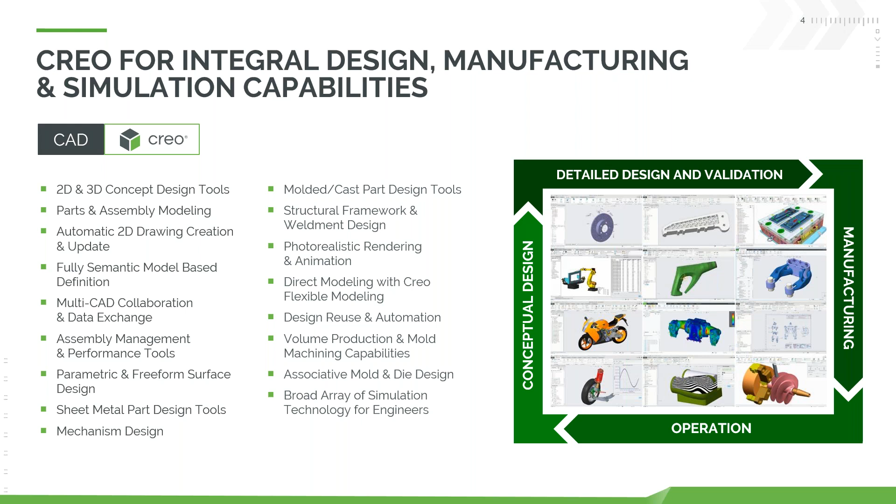With every release, we always focus heavily on improving this broad set of capabilities across the entire breadth of the product, focusing on making the end users more productive on a daily basis, whether that's refining certain workflows, making tools easier to use, or adding additional capability to the product - really focusing on making every engineer more productive day-to-day.

So we look at these emerging technologies on an ongoing basis and figure out which are relevant to manufacturing, which are relevant to CAD per se, and start integrating those technologies into Creo - but integrating them in a way where they work exactly the same as any other capability in Creo. They're not a separate standalone technology that results in a broken tool chain. They are part of the design process. They are fully integrated into Creo. They look and behave exactly like a Creo application.

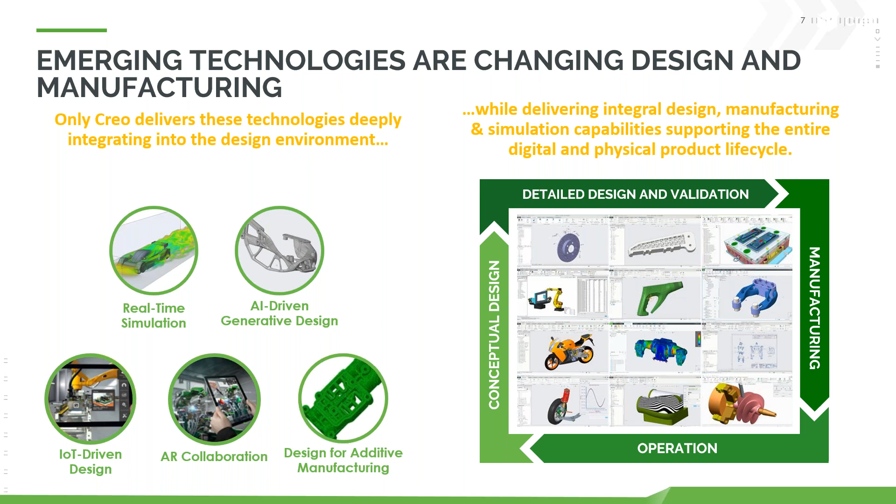So hopefully that's given you a quick high-level overview of the strategy with Creo—twofold: focus on expanding and making the core set of Creo capabilities easier to use, making the everyday user more productive, while at the same time understanding, leveraging, and integrating emerging technologies into the Creo set of tools, making sure Creo remains at the forefront of innovation and engineering.

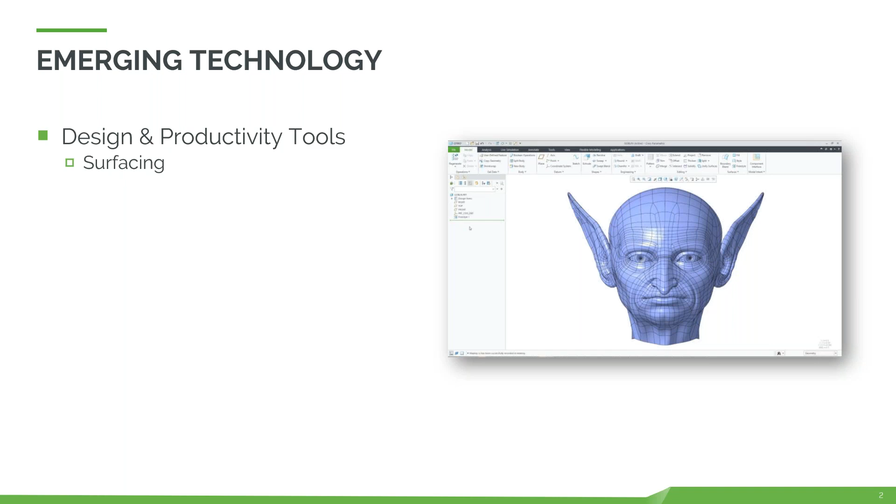Even tools like human factors and ergonomics - in so many different industries this is a hugely important area, where it's not just making sure our products work, it's how do they work for the everyday user. How do we take into account the people working with this, our demographics, from the low scale all the way up to the high scale? We want to make sure we're making our products work for all of those different demographics.

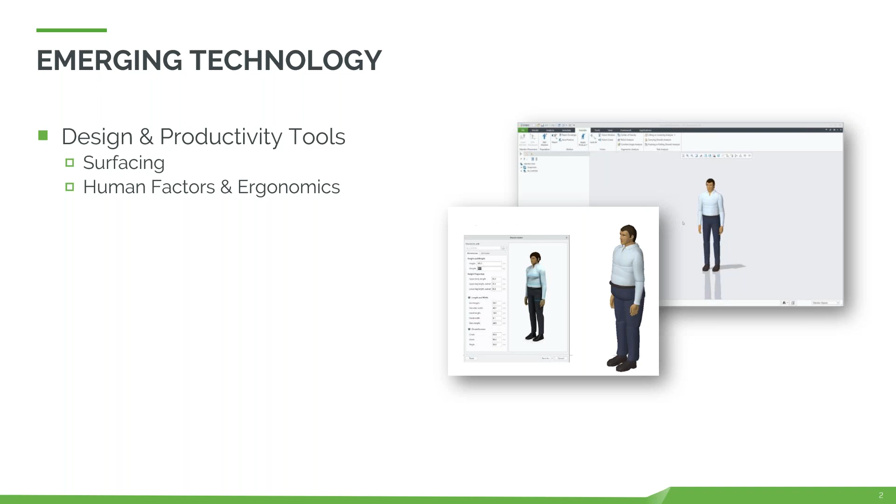So we have tools specifically in Creo that allow you to do that type of human factor and ergonomic analysis, making sure your users are able to reach certain things, that they're able to see what they need to, and at the end of the day everything is being done in the most ergonomic way possible. And if it's not, you want to have access into that, be able to see it and make changes before something gets sent out to the field and into action.

We also have a lot of enhancements, like Paul mentioned earlier, in the area of manufacturing, and it's something we've had incorporated into Creo for a long time now. It's essentially always been a part of what we do from the context of Creo, and that's why I always say it's less a 3D modeling tool and more so a product development suite of tools, because it's more than just building out our 3D models. We want to expand into essentially every area of the design process, and one of the big areas for that is...

Manufacturing. We see people that build out designs for casting, for molds, for everything from extrusions, mills, lathes, additive manufacturing - all these different areas you can think of. We essentially don't want to limit you in terms of how you're going to build out a design. So the idea going forward is to build out the model in the way you think is best, without having to account for a lot of what you're doing for manufacturing - just build up your designs, and then we have tools that are able to account for specific types of geometry.

First and foremost, we've always done a lot of work in the area of subtractive manufacturing, things like three-axis mills and lathes, to build out from a stock piece of material. But we're also starting to support a lot more enhancements around that area.

We see some very complex machinery, things like 5-axis mills, where we're able to get to more complex geometry from just a single stock piece and being able to automate that process. Even combinations of mills and lathes, for example—a lot of people do live tooling where you're combining both of those two technologies. We're able to support a lot of those different enhancements going forward in the context of our Creo designs, get these things built out, and put them onto any level of manufacturing you need to do on the subtractive side.

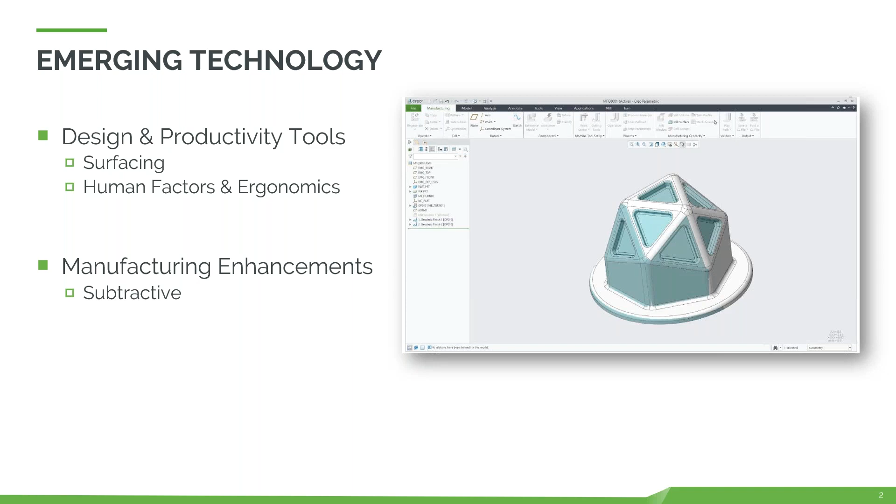And then a huge area that we work with here within the context of Creo is also additive manufacturing. This is another area where we've put a lot of time and effort, specifically into our additive manufacturing extensions in Creo, to give you all the functionality you need to build out designs with truthfully an entirely new world of capabilities in mind.

One of the biggest areas we've had to focus on, and something I'll actually show in my demonstrations today, is creating lattices. Lattices give you the ability to create very strong, robust geometry while saving on material costs or making a design more visually appealing. It's generally something that simply wouldn't be possible using more standard manufacturing techniques, but for a 3D printer, it's a piece of cake—not only to design and automate in Creo, but also to create out on that 3D printer.

You'll see there are many different types and configurations you can build out in Creo, from more 2.5D shaped lattices to full 3D formula-based lattices, where we're able to cut out the use of support materials. It's still able to give you a design that's structurally sound, but efficient and optimized for the things you care about. You can take out weight and still maintain the structural stability of your models.

With anything we do from a manufacturing perspective, we have a strong integration into our different optimization, analysis, and design tools, even into integrating with those machines from the direct interface of Creo. For example, we have interfaces with companies like Materialise and iMagics, where we're able to connect directly to 3D printers right from within the same interface as anything else you're doing in Creo Parametric. I'll show a little bit about what that process looks like as well. Essentially, our ability to give you one single environment to do that level of design all the way down to manufacturing is something we have a big focus on, and we'll definitely keep building out going forward.

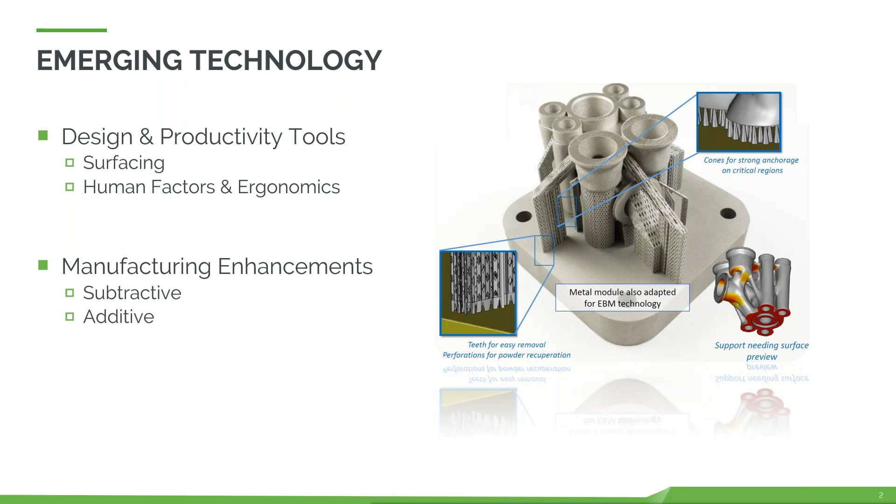Another area you've probably seen in the past is the idea of model-based definition. Traditionally, the process has been that you build out a part, and then you build out a 2D drawing that you send out for manufacturing, whatever that might be. Now the idea is that going forward, we really want to support a lot of the work we'd typically put onto a 2D drawing to send out for manufacturing.

We're able to do that right on the model itself. So whether it's a part or an assembly model, you can take everything you'd normally do for dimensioning and tolerancing, and everything you need for the manufacturing side, and just do that right on the model.

This first and foremost makes you more efficient in the way you're working. You can do more simultaneous work in the sense of building out the models, and at the same time we're able to lay out a lot of the geometric dimensioning and tolerancing that we need later on down the line.

Secondly, I'd say the biggest benefit to any type of model-based definition is just the clarity you're getting from these models. It's no longer that you're trying to interpret a large-scale drawing where it's hard to understand what a certain line, dimension, or tolerance is referencing. We can lay this out from a much more functional standpoint, giving users all the way down to manufacturing the ability to pull up these models, see them from different views, and much more clearly understand the work that needs to be done on them, and everything associated with that model in terms of how we need to get it built out.

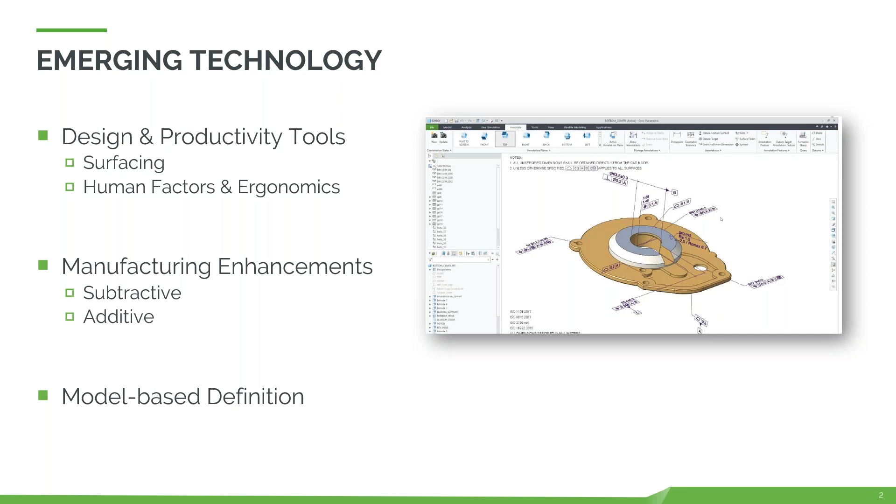Now I can go through and show a couple different examples of what it looks like to use some of these different tools from within the context of Creo. I'll first show an example of human factor and ergonomic analysis. Then I'll take a step over and show some of our more traditional manufacturing enhancements, and then even into our surfacing capabilities - I can walk through that as well.

In a later portion of the demonstration, I'm going to show a few different areas around analysis and what we might do for additive, but first I'm going to show some of these more standard techniques and traditional enhancements - still emerging technology, but more so for the everyday engineer and designer. Let me switch over now, and we can jump right into it.

First and foremost, let's start with some of the surfacing work we've done from within the context of Creo. I'll go ahead and show you what we've done with our freestyle tool.

So now we're here within the context of Creo, and I'm going to be opening up a part that we want to use for our freestyle design. More specifically, first I want to dive into some of the new brush capabilities we have available, which I'll show in a couple different examples.

You can see here that this rabbit was actually created using what we call the reconstruct from facets feature in freestyle. So this could be a model simply sent over from another system, but from within the context of Creo, it could also be a model where we use a 3D scanner to pull up and bring into our context.

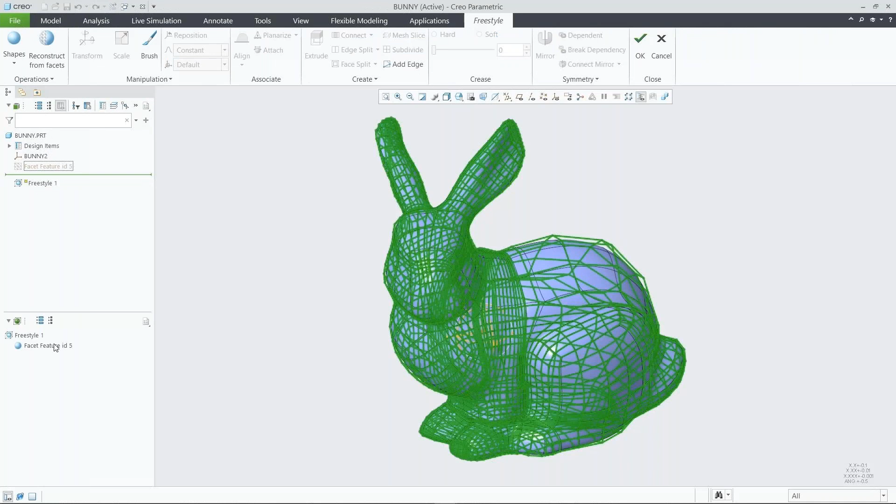That's something we could go through and work with and still use in, for example, our concept design phase. With this, we have different options to change the resolution to give us a little more control if we'd like to.

Then up at the top, we'll go ahead and open up the brush tool, and you'll see we have a few different options here. The first option would be pull, which moves our mesh vertices along their normals. This brush size has a lot of different settings we can change to increase or decrease the detail and the size.

There are even options around softness and intensity to really give you some more organic looking surfaces, and these can always be changed while you're working.

Once you have everything set how you want it, you can take your brush and start doing some manipulation on the mesh. You'll see that as I move the mouse along that surface, it's pulling on the different facets to give us different types of geometry.

One quick thing you could do is hold the shift key, which will allow you to push that geometry in the opposite direction.

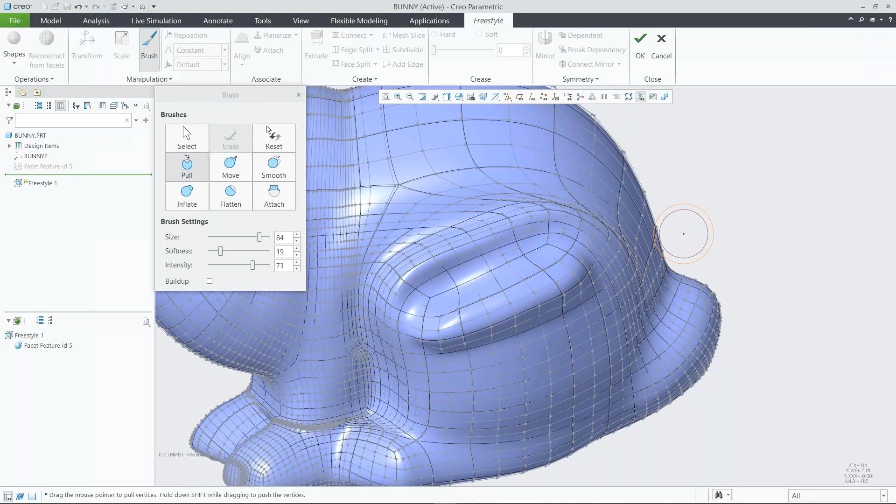From here, inflate is another brush option we have to more uniformly scale that mesh. This could be useful for one of our rabbit ears, for example - let's go ahead and try that out here.

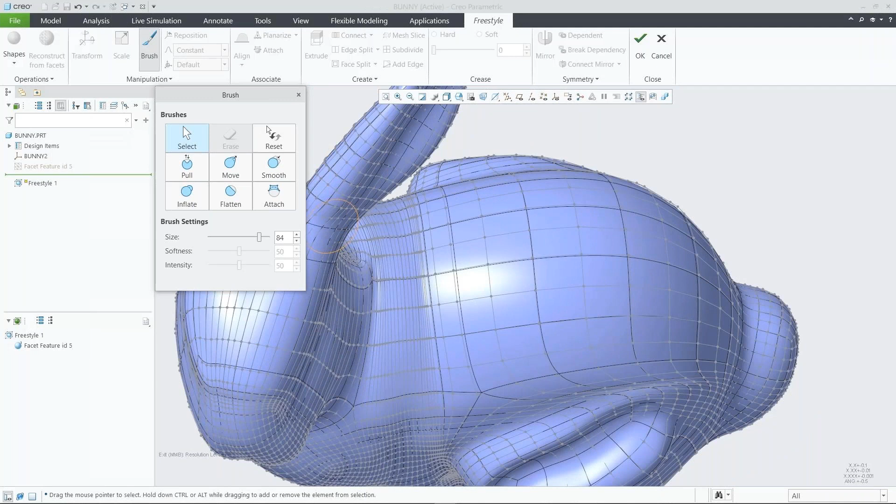One other useful tip for the brush is that it can also be used for general selection on the model. This is a quick way to go through and select faces on that surface, getting different areas of the mesh.

Once you have that selection, it's just as easy to jump back up into your different brush tools to make the proper adjustments, whatever you might need to do in that sense.

So that's a quick look at some of the different options we have around our freestyle tool. It supports what we're doing on both the parametric side and surfacing work, but also for users starting to work more into the organic world wanting freeform style shapes. We have a lot of capabilities in that sense as well.

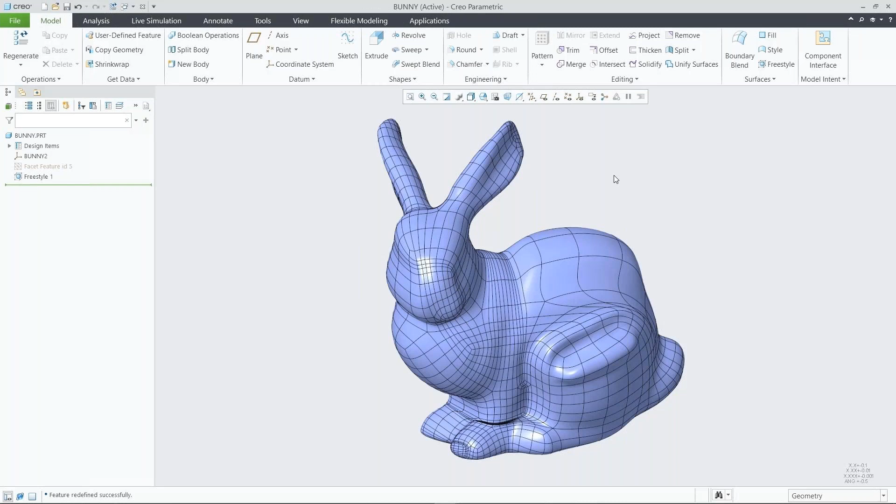From here, we'll switch gears and talk more about human factor capabilities. Some users might know this as Manikin. Depending on the different types of designs you're working with, you have a lot of different considerations to take into account—fit, ergonomics, and for something like a motorcycle, these types of things are going to come into play.

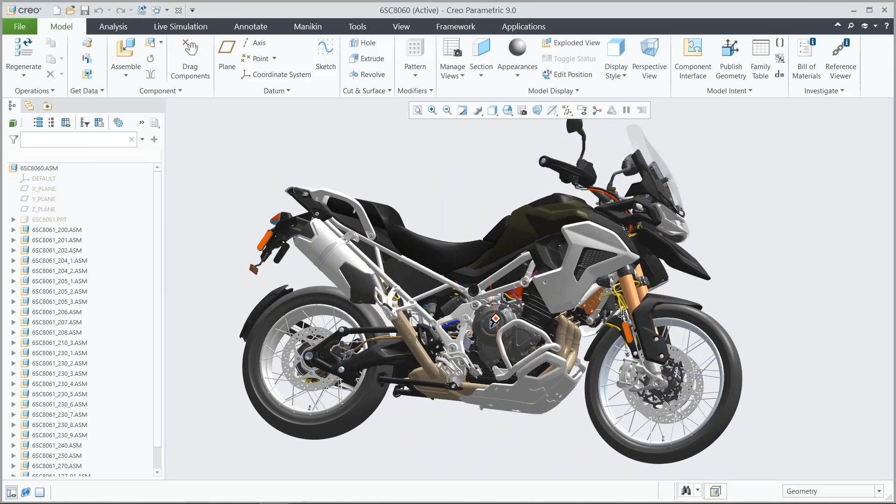That's what human factors is all about. We're able to bring in these human models and make sure they can see what they need to, make sure they can reach, make sure they fit. Going forward, we're introducing a lot of new functionality around this.

One of the biggest new features is the ability to create custom manikins. We have a huge library of standard size people—tall, short, various ethnic backgrounds—and what we're able to do now is take that and customize it.

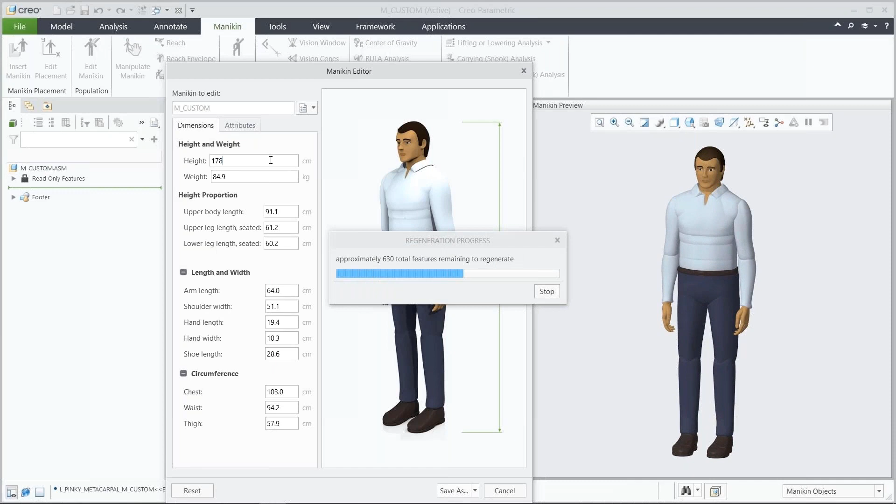We can make them however we want—taller, shorter, heavier, longer or shorter arms—whatever best fits the demographic we're designing around. If you're targeting a specific market or have certain limits, you can build that out on your own.

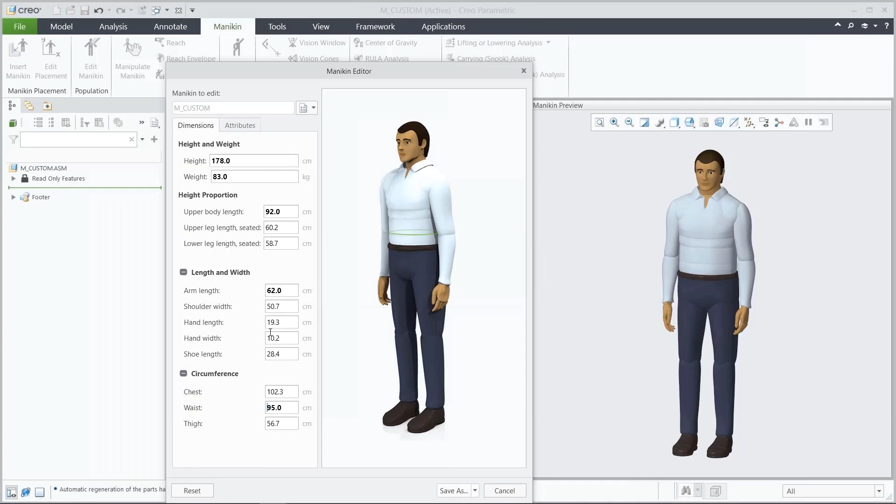You can see it's a very easy to use interface here—set the height, the weight, different components. Then you can take these and use them in any of your standard human factor analyses. Set these up exactly the way you want, change the chest size, the waist height, and lots of other attributes.

Once you have it how you like, you can go ahead and save that off. This will be an inseparable assembly, so it's very clean and easy to work with inside our other assemblies. Now that's something completely customizable.

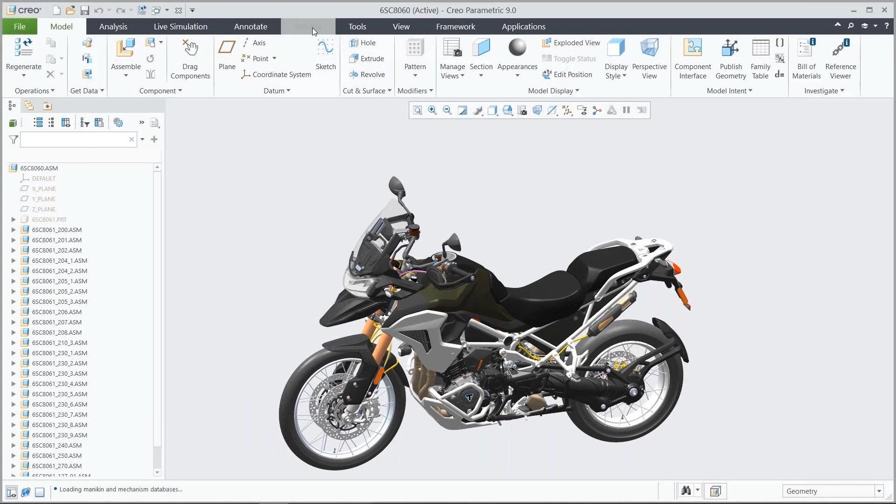What I'll do now is go back into our model and add him in, making sure he'll fit correctly. We'll jump right up into Manikin and insert him into the design—specifically, let's grab the custom manikin we were working on.

We want to place him onto the bike in a seated position. So there are a couple of different references we lay out for that—where we want to place him, what direction he's facing. Essentially it's a datum plane or a surface from his bottom side, and a direction to face him.

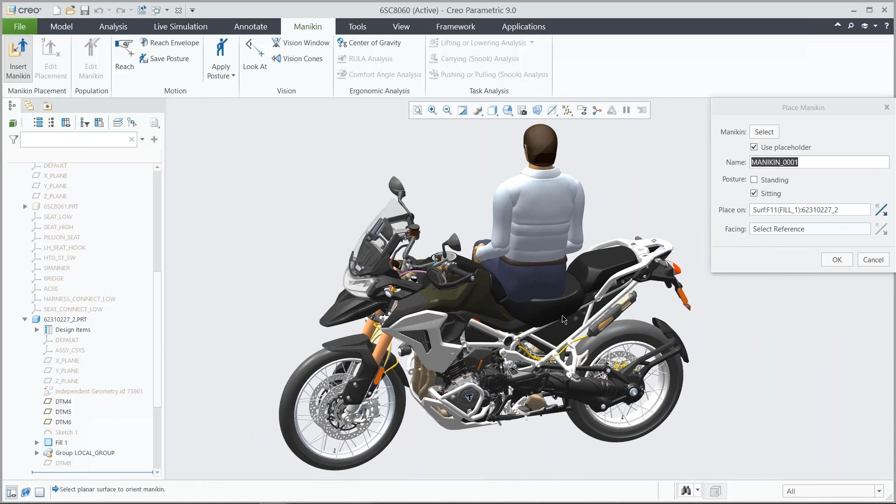Once he's situated in there, we can work with our new interface for changing things around. Over on the left, what we have first and foremost is a manikin tree that lets us manage all the different pieces and snapshots in time.

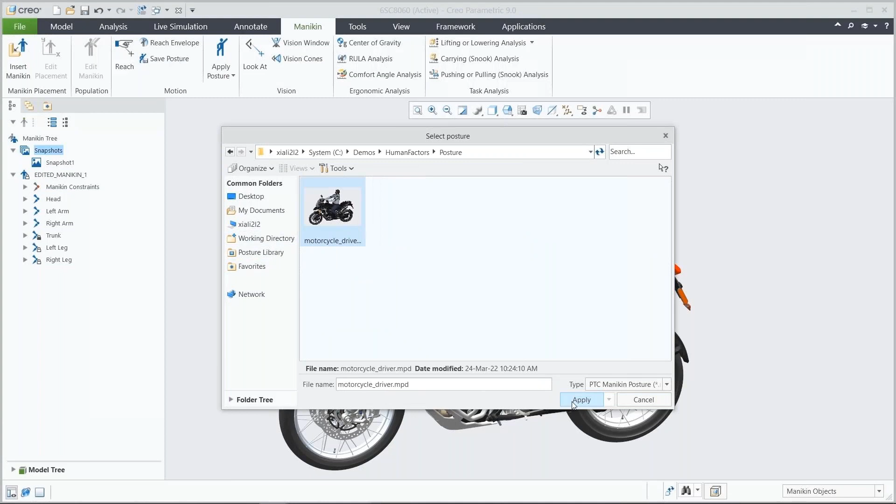How this works is we can put the manikin into different postures, hands in the right positions, and take snapshots of that. We also want to make sure he's able to reach what he needs to and use this functionally.

What we have is a new reach feature built out here—if your manikin would be unable to reach, it puts the arm out as far as possible so you can see exactly how close you are and what that distance is.

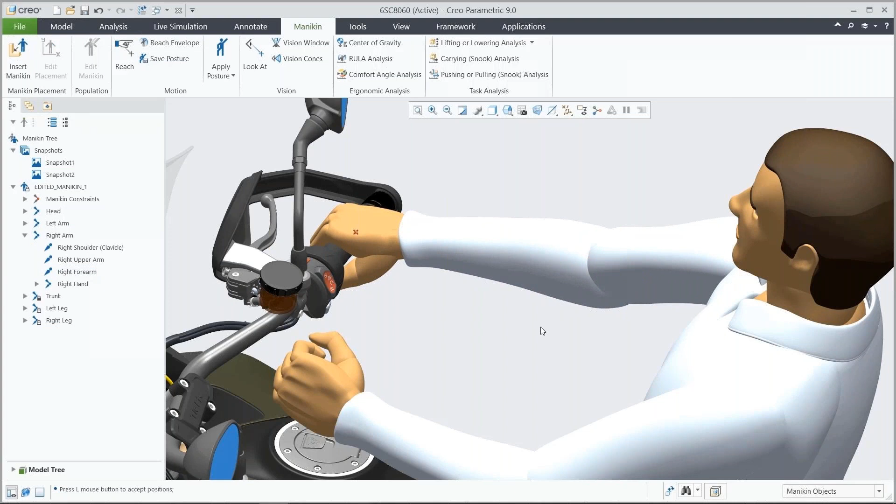In my case, it seems to be working pretty well for the right hand, and we can put the other, left hand in there as well. We can use our new dragger functionality to make it easy to adjust and make sure it's comfortable, for example.

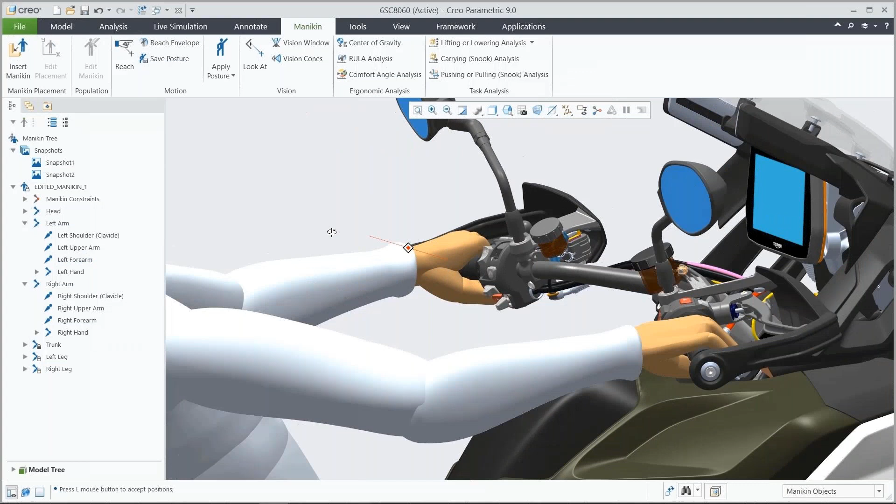And from there, we can manipulate him, change the forearm position, use that 3D dragger to move the arm, and make sure that everything's working as it should. You might want to do something similar with the feet once our hands are all good. That's the way this works, aligning different points in the model with different points in the manikin.

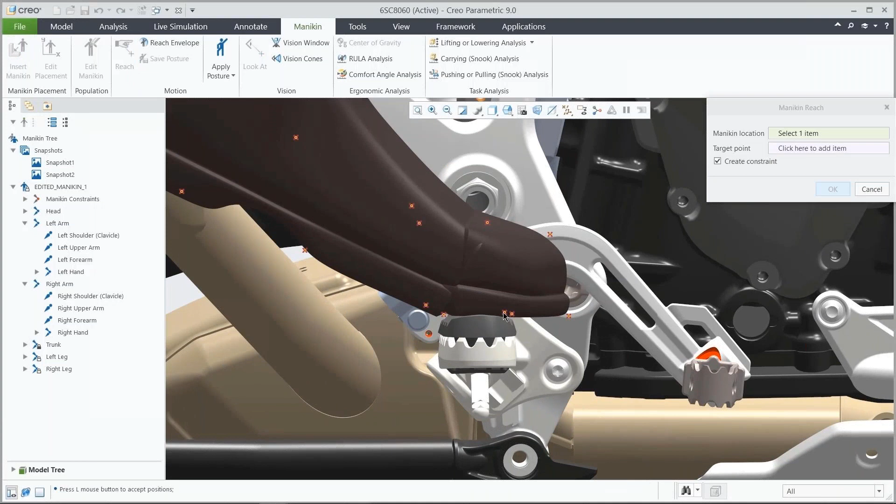It's fundamentally how that reach feature works, but it's going to work with the other limbs as well. We can do the same thing on the other side. Just make sure that these motions can physically be done, but also that we're not going to have problems, like if the leg were to interfere with the muffler or your toes bumping into something. It's much better to figure that out here rather than having to build out a full-scale prototype.

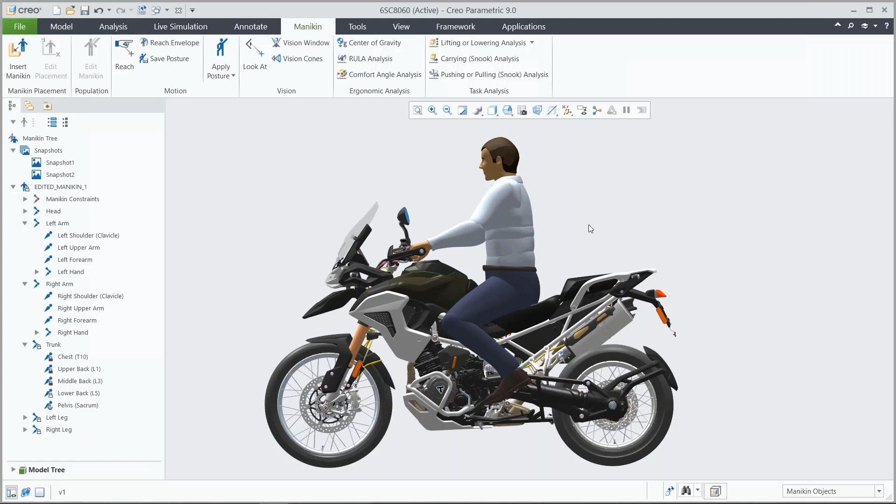All right, maybe we notice that our model here looks a little bit uncomfortable. What we can do is make some changes if need be, using that from our Manikin tree on the left. We use the dragger to move him into the right positions, trying to make his riding experience as comfortable as possible. These are so easy to build out in Creo going forward. I think he's looking pretty good now, the mannequin's just about good to ride, get on the road. That's just an example of what we can do there. This has a ton of different capabilities that'll work for so many different industries out in the world.

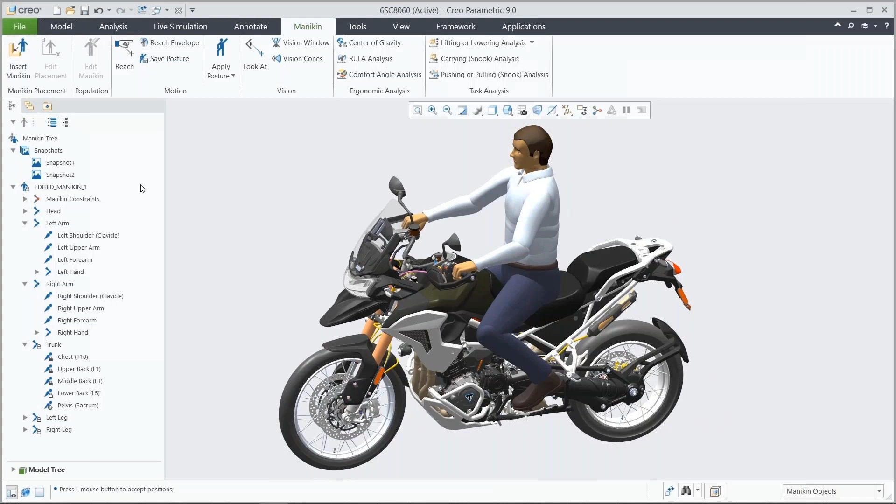All right, let's move on from there. I want to touch a bit more now on the side of analysis, and how we look to improve what we do from an optimization standpoint. One of the biggest things you've probably seen, and something that's been a huge ticket item within Creo for a few releases now, is our partnership with Ansys.

This was a no-brainer for us, to start integrating their market-leading technology right into the Creo Parametric environment. This is done in a number of different ways, and the first way we started to build this out was with a tool called Creo Simulation Live. The idea is that we wanted to break down the wall between two different worlds, design and simulation, and work in one unified modeling and analysis environment. Our way of doing that was with our Simulation Live extension, the first tool we built out through our partnership with Ansys for embedding their Discovery Live simulation engine directly into Creo Parametric.

It uses a very powerful linear solver, giving us the ability to do multiple different types of simulation, from structural, thermal, vibrations, to fluid analysis. One of the biggest areas this helps with is the fact that normally designers don't have a lot of experience around analysis. They aren't very experienced with doing defeaturing work or building out meshes.

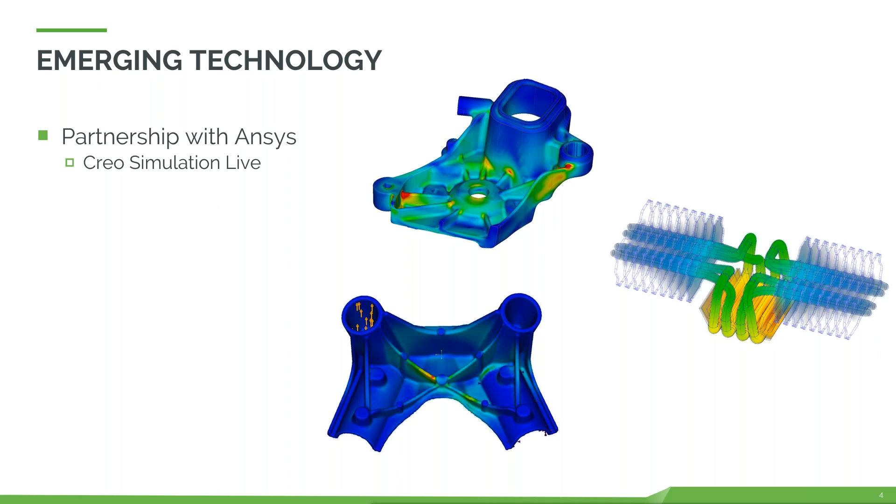But one of the greatest things about a tool like Simulation Live is we don't have to do any of that. It's a meshless environment, removing the need to create a mesh on the model, and the analysis is instantaneous. That means when we make changes to the part, the materials we're using, or even the analysis definition itself, it's all able to automatically update and give you results back very quickly. It's an extremely powerful design tool for the early to mid stages of the design process, and something our designers and engineers will get a lot of great use out of.

Now, the second tool we built out through that partnership with Ansys is called Creo Ansys Simulation. This is a more comprehensive tool for doing your linear or static analysis, covering the same areas of structural, thermal, and vibrations, but it's a bit further along in the process. Whereas a tool like Simulation Live helps you do design work earlier on, this helps you as you get more towards validation style analysis, where we want to understand how our models will perform when it's time to send them out for manufacturing or prototyping, making sure our models are good to go whenever it's time to get them built.

And this is still a very easy environment for setting up different studies. All the loads and constraints that you're laying out here that we pulled over from ANSYS are still going to work well. This is good for a designer or engineer. But at the end of the day, it's still using that extremely powerful, proven technology that we have from ANSYS to give our users the confidence to make sure that the designs they built out are not going to have issues when they send them out into the real world, and make sure we're really sending out the best models possible.

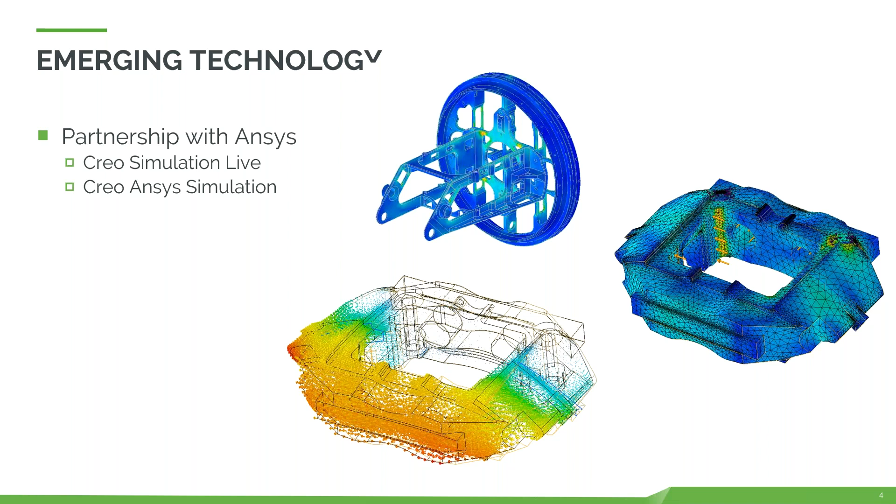Along the same idea, we also have a lot of strong capabilities within our flow analysis tools from within Creo. This is a tool that we've built out through one of our partners, Simerics, to put fluid simulation capabilities into the hands of our engineers and designers. It's normally a tool that requires extensive knowledge, experience, and truthfully a lot of money to get some of these studies built out in other areas of the industry. But within Creo, it's something that we give to all of our designers and are constantly making improvements to. We are really on the cutting edge of a lot of this fluid simulation capability.

There are so many different areas you're able to go through and simulate for your fluid analysis, whether it's internal flows, external flows, or even some level of optimization from within Creo tied in with your fluid dynamics capabilities. That's something we're able to do, and another area we're constantly making improvements to. So if you haven't seen any of the new areas we've built out into flow analysis, it's definitely something you're going to want to check out.

I can also go through today and show you some of the new capabilities we've built out, and some of the new interface, what exactly that looks like from the context of Creo, if you haven't seen that before.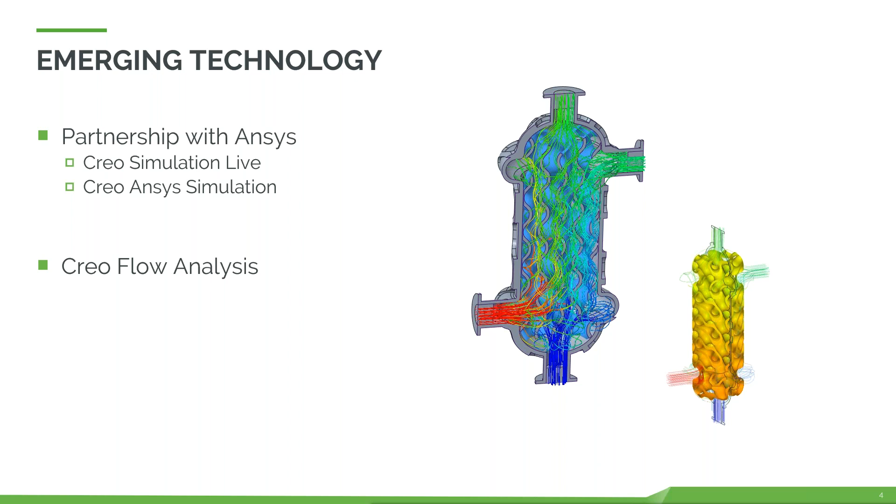And then the area of generative design is a huge ticket item that we have now within Creo. If you haven't seen this, this is essentially our tool for autonomously creating optimal designs from a set of system design requirements that you have. Say, for example, you have certain loads or constraints or preferred materials you want to work with, or manufacturing processes, and you don't know exactly how you want to go through and build out that model. Well, that's where generative is extremely powerful. It's something we're able to use to create these optimal designs without you having to understand exactly how you want to build out that geometry. Just let Creo do this work for you.

So this is a tool we call Generative Topology Optimization, or GTO, where we lay out these different goals and requirements, and then the system will go through and generate designs that you or I, as human beings, probably would never have thought of. We can use these either as a base for a product we want to further refine, or even just as a means of concept generation for other designs going forward. And you can run as many of these as you want. We don't want to find a design that simply just works. We want to build out these designs with all those different design goals and manufacturing constraints in mind, and work with this much earlier on in the process, doing that level of optimization without those pre-existing biases we typically have.

Now, one of the areas we're able to take advantage of here is what we call cloud-based computing. This is utilizing our full generative design extension, where we're taking all the functionality we have in our topology optimization, and now we're going to be utilizing the cloud to enhance our abilities and really take that generative design to the next level. And getting started is a seamless process. There are no licenses or software to install. You just have a direct connection from Creo right up to the cloud.

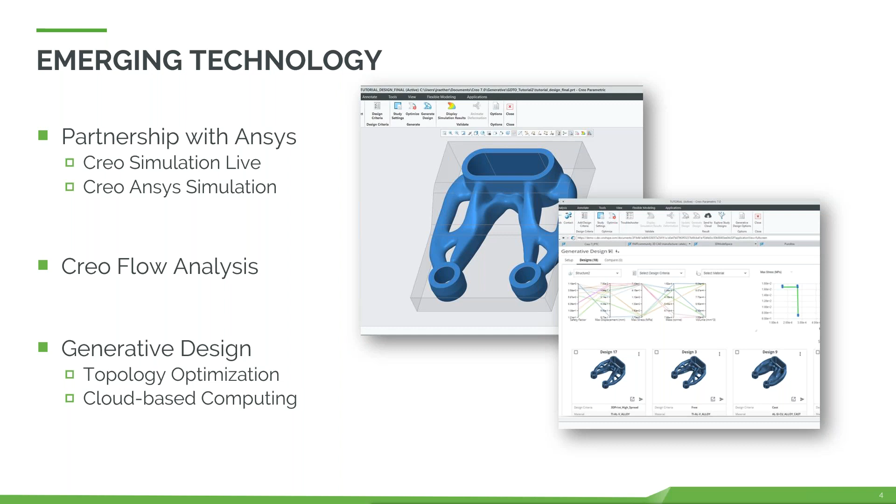All right, from here I can go through and show a couple of examples of what some of these different areas look like. First and foremost, I want to show you a quick peek into what we have for our Simerics tool from the fluid simulation side of things. Then I'm going to switch over and show what it looks like to do some generative design, as well as latticing, and even into the areas of 3D printing and AR. There's a few different areas I want to go through and walk through here. So without further ado, we can go ahead and switch over into that. And again, if you have any questions, feel free to drop those in the chat at any point while we're going through here.

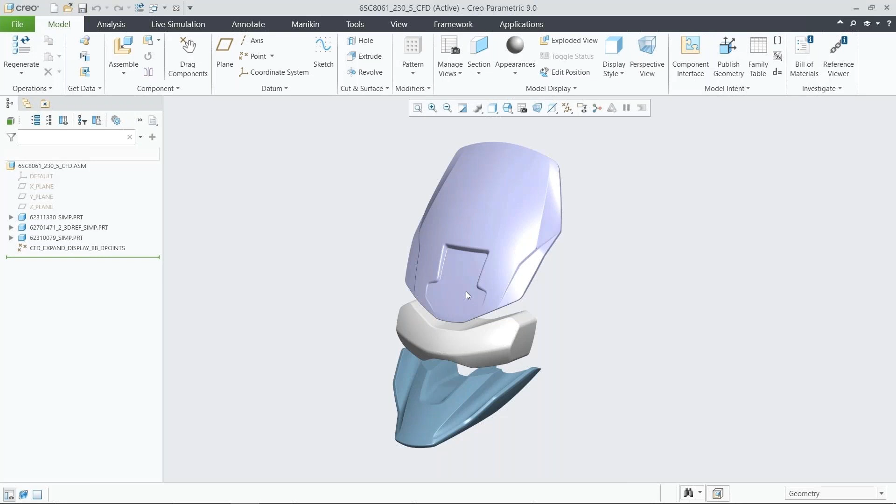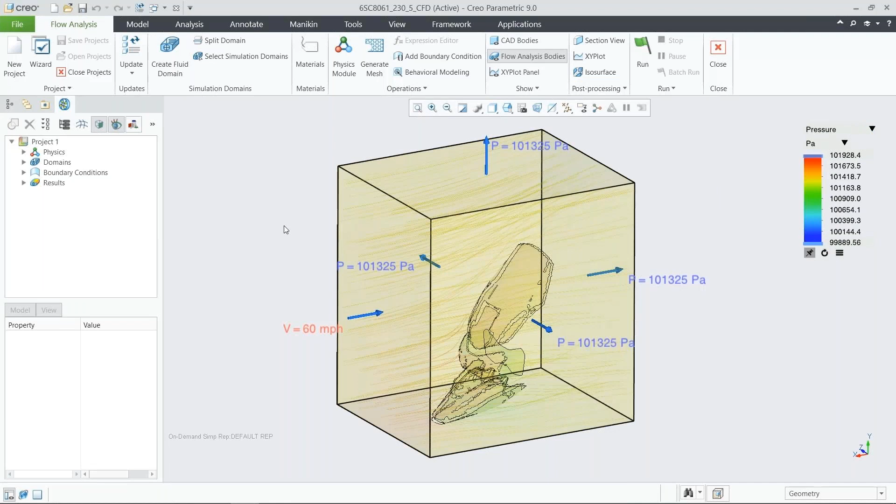All right, so we're going to go ahead and dive into a quick flow analysis demonstration. In this case, I'm going to show our integration with what we can do from our behavior modeling studies. So in this case, we're looking at the front of our design. We've got a windscreen, the dash, the beak down at the bottom. And with this, I have a few different initial conditions set up. If you haven't seen this tool before, we're essentially doing these flow analysis studies right from within Creo to look at many different types of fluid simulations. In this case, it's going to be an external flow, but this is very easy to work with, very easy to see and visualize the different results from the study. You can very easily change around what you're looking at with these pop-up toolbars to get everything you need right in front of you without having to track down various menus. So in our case here, you'll see that the front of the flow is entering in at 60 miles per hour, and these are the pressures. You can see the results that we're getting from there.

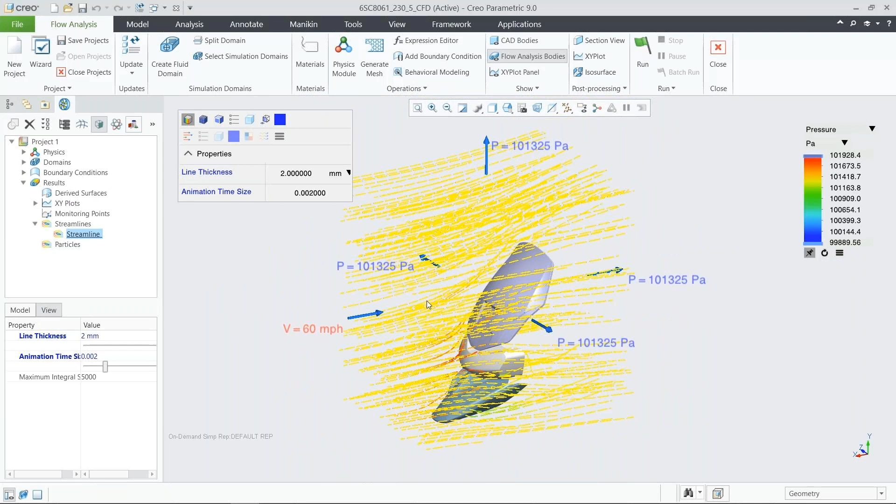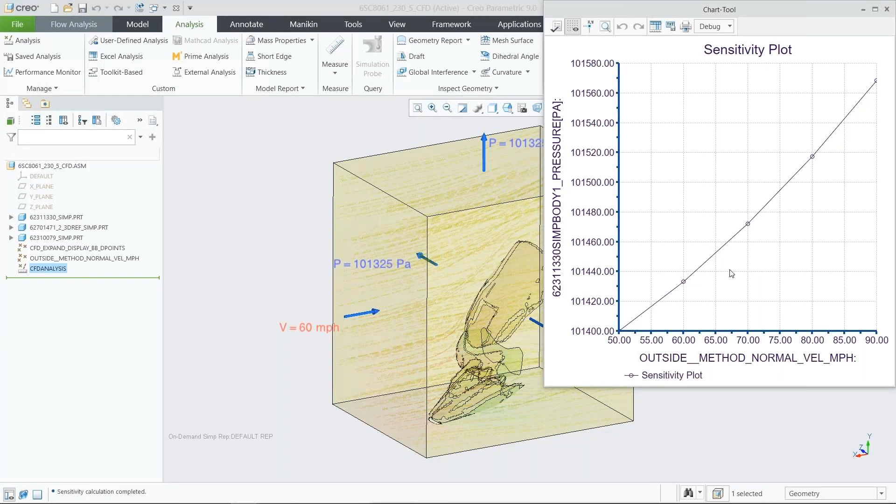That's pretty good, but say you want to improve upon that, get better results in some way, or even see if the design can give me the minimum results that I need. What I'll do is set up a behavior modeling study. What this now becomes is an input parameter that I can use with other variables in my design, such as pressure, and it helps us answer certain questions. Say, what speed will we be getting to see that pressure we're concerned about? Maybe we need to stay under a certain pressure, and that's really what these behavior modeling studies in our flow analysis give us the ability to simulate. So instead of us having to manually try out different design variables and design parameters, we can instead let Creo do that work for us and see what we get. So the first thing we're running here is a sensitivity study. If I vary a parameter or a value, what type of results are we going to get? In this case, for pressure values. It's a lot faster than us having to go through and iterate through values to see what we get. We can instead just let Creo go through, compute that for us, see what we get, and we can see that all plotted out.

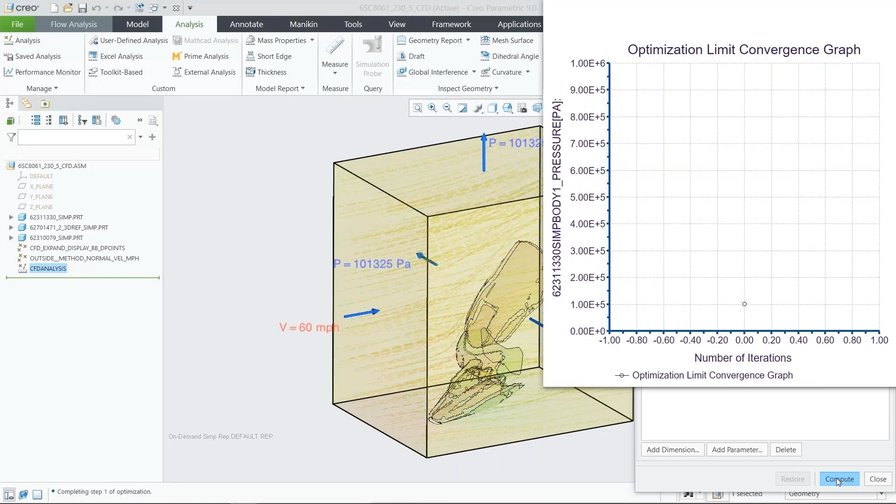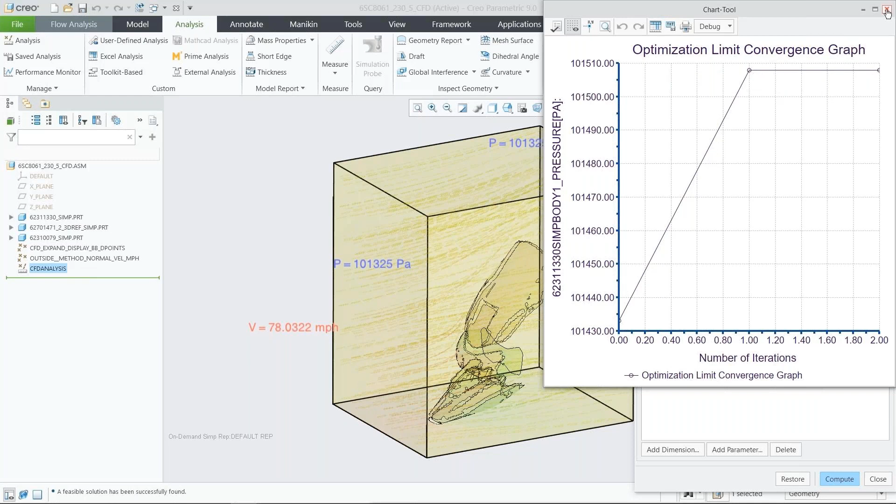And even better now, what we're able to do is an optimization. This is another study that we can use to get to our most optimized model. This is normal Creo functionality, but now we can go through and directly make use of that here in our flow analysis study. So in this case, maybe set the pressure on the part to certain values - that would be my design constraint. And then we can say what we're allowing the system to vary, so we can allow that velocity to change. What's great about this is the fact that we could run multiple different parameters or constraints, different variables, and just let the system run. If the constraints we're looking to get to are impossible, the system would let us know. But it's a lot better than us having to fumble around for a day trying to figure that out. So we can instead let that run through, see what value it converges to for our optimal result based on however many iterations we give the system to run through. And then once the system converges, we're able to see exactly what that value will be, and it's something we can automatically have applied to the study once we get that value.

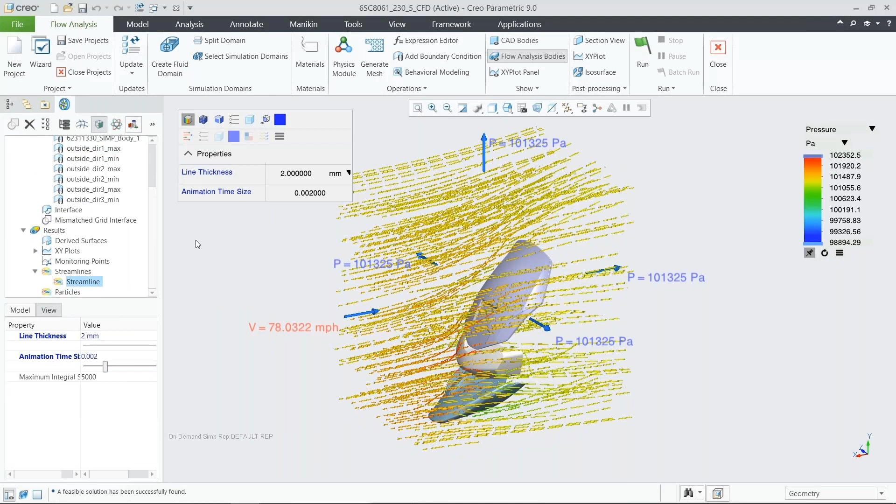And once you have that change, you're able to run back through here and get the new results for the study. So really working to understand what that more optimized model is going to look like, doing this type of refinement work throughout our flow analysis studies—not only getting to a design that simply works, but getting to a much more refined and efficient model at the end of the day.

All right, there we go. So a quick look into that type of study.

What I want to switch into now is another study that's going to show a lot of different examples—almost like a tasting platter for some of the different areas of Creo I haven't covered yet, and show how these can integrate with one another. Let's take the last 10 minutes or so of our webinar to go through a few different areas on our lawnmower assembly.

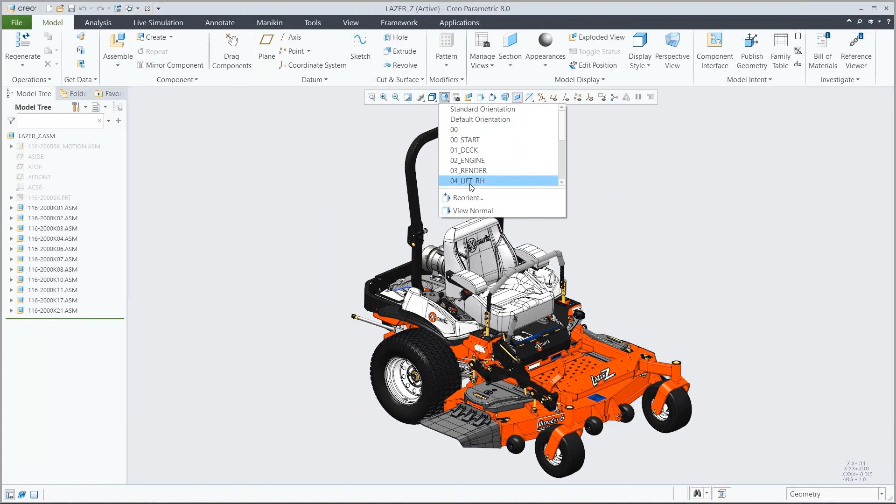Specifically, let's get a part off of the mechanism located on the right-hand side here. This might be a part that's in active development we're working on right now, but we want to see if we can improve the design or simply reduce the weight of the part. So what we can do is utilize our generative engine for that.

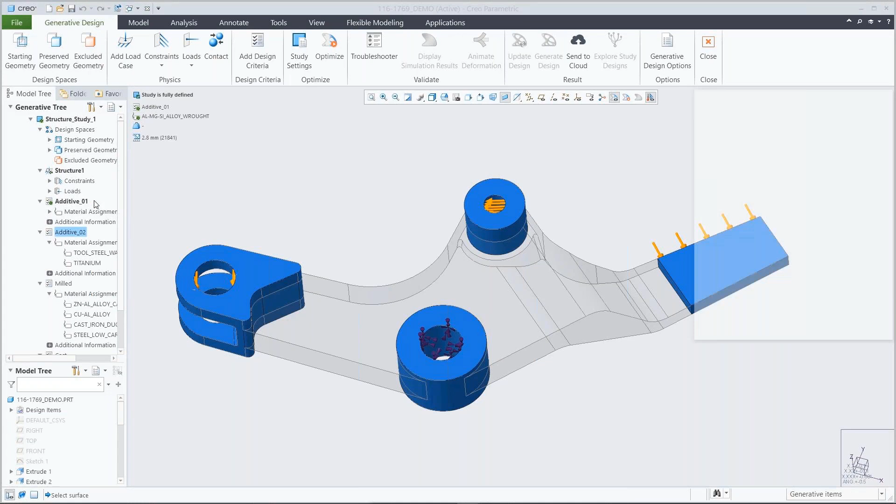This process autonomously creates optimal models from our different set of system design requirements—could be manufacturing processes, materials. We can focus on many of these if we'd like, many different materials, laying out all the manufacturing techniques that you and your team have available.

You could run each of those one by one right from within Creo, or we could take advantage of our cloud computing to run all these different considerations in parallel. We use this cloud platform to simultaneously calculate all the possible study solutions for different material parameters and manufacturing processes, using this high performance cloud computing.

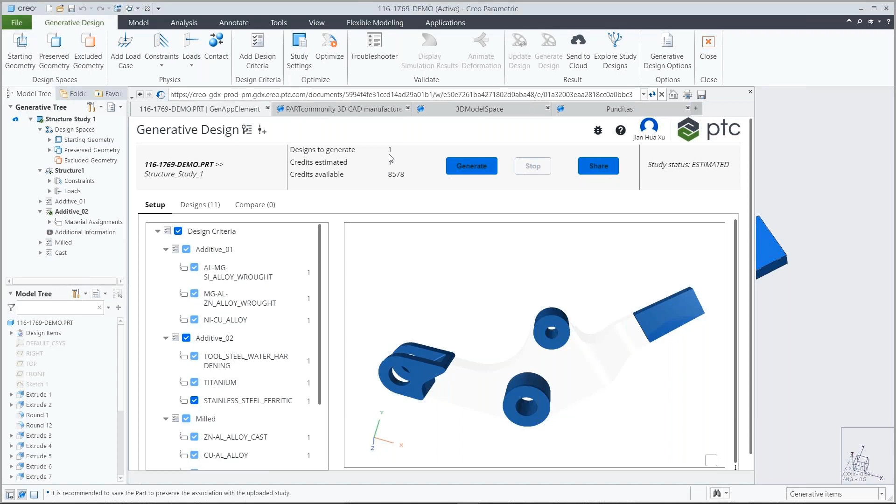What you'll see is that we're actually working right from within Creo using the embedded browser. What we've done is upload our complete study setup containing the different design requirements and criteria we have. In this case, Generative Design saw that we might have made a change to the study we were working with, so we can go into our setup and add in that stainless steel alloy. Once we generate that, we're brought into the Design tab.

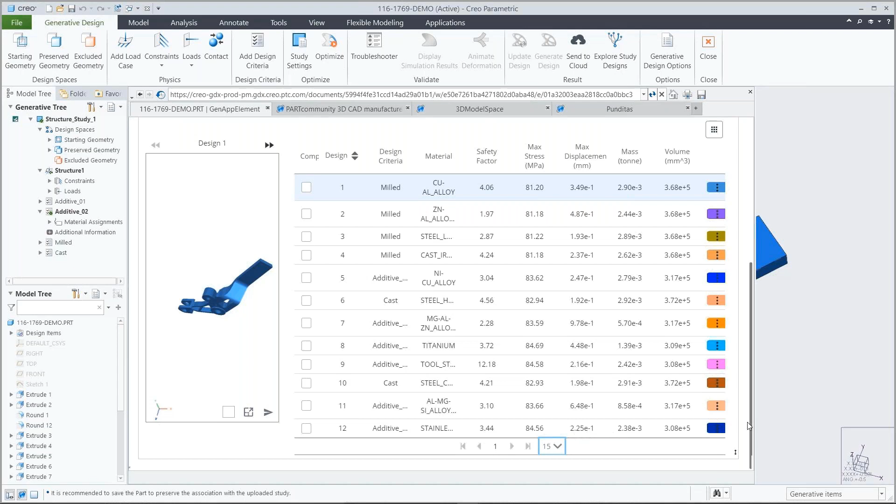This is where we can go through and look at the results for each of our runs, begin to filter through the data to see exactly what we're working with. We can also monitor the progress of our current design study as it's being run, and once it finishes, we can start to filter through the data to focus in on a particular design.

We can do this by selecting on different design criteria. You can focus in on particular materials to see how they performed. You can select on a few of those runs and then compare how each of the materials did against one another. The graphs you're looking at here are all very interactive.

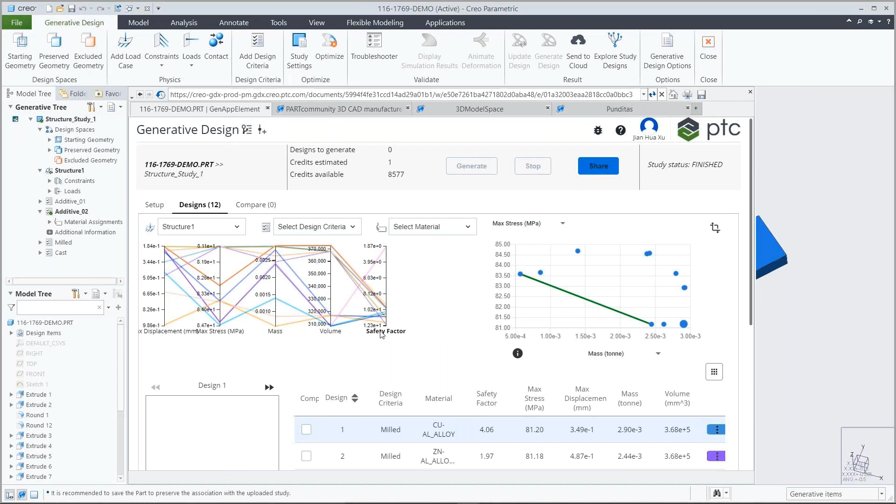You can flip the axes. You can even select on particular ranges that you want to work with to filter out any of the designs that don't fit, say within a particular safety factor.

We could do the same things for stress values and mass, and as it's doing that, the amount of designs passing through is being lowered, ensuring we're only getting the best possible designs going forward. You can also see graphically, up in the top right-hand corner, how each of these designs stack up against one another. You can change any of those axes to prioritize what's most important to us.

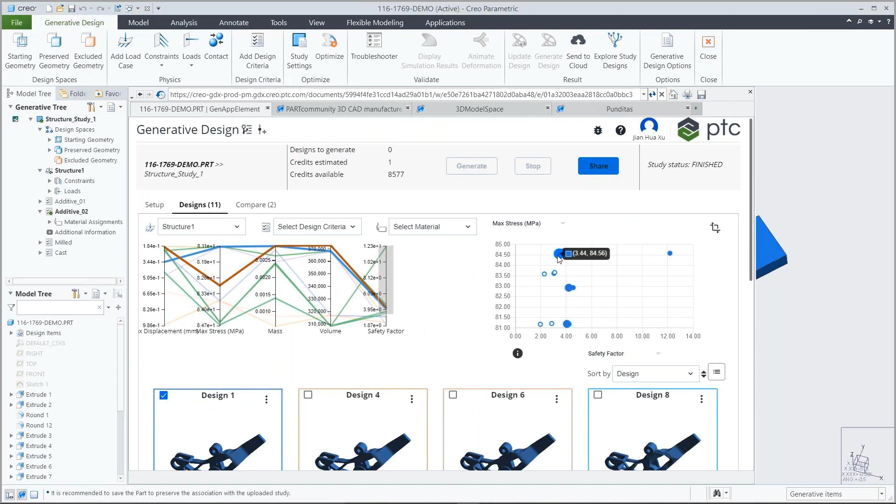This makes it a lot clearer to go through and select only the designs that do well on multiple factors—say, lowering mass, keeping max displacement down, or focusing on the highest safety factor. Once we've narrowed that down, we can do a direct comparison between each of them.

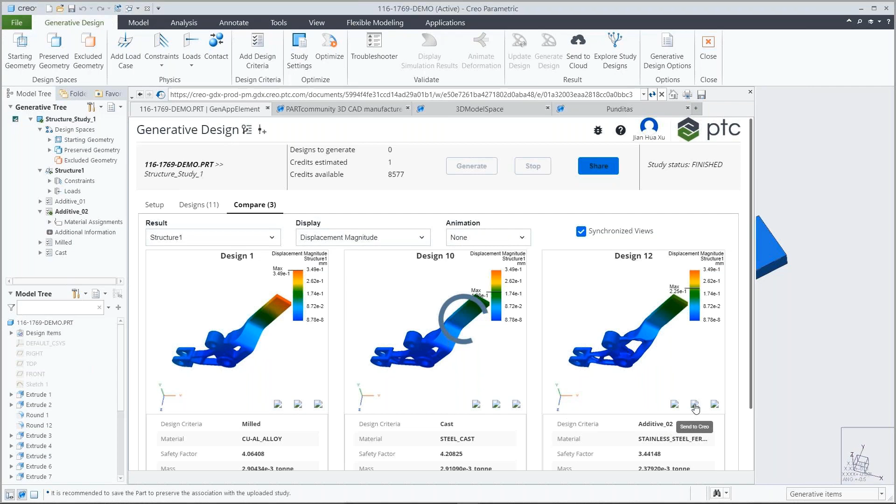So we can see each of the designs side by side, display values like von Mises stresses, see what we're getting in that sense. You can also take a look at the displacement that we're getting, even get a better understanding of that by animating the deformation. Whenever I move one of those views, the others are going to update as well.

From this point, we can share the designs with our team, get some feedback, and ultimately select one to bring back into Creo. We're able to take that design and, back in Generative, choose to generate a full B-rep or boundary representation, which Creo does very quickly. It's all been built out using that optimized geometry via the freestyle feature, integrated back in with our initial geometry.

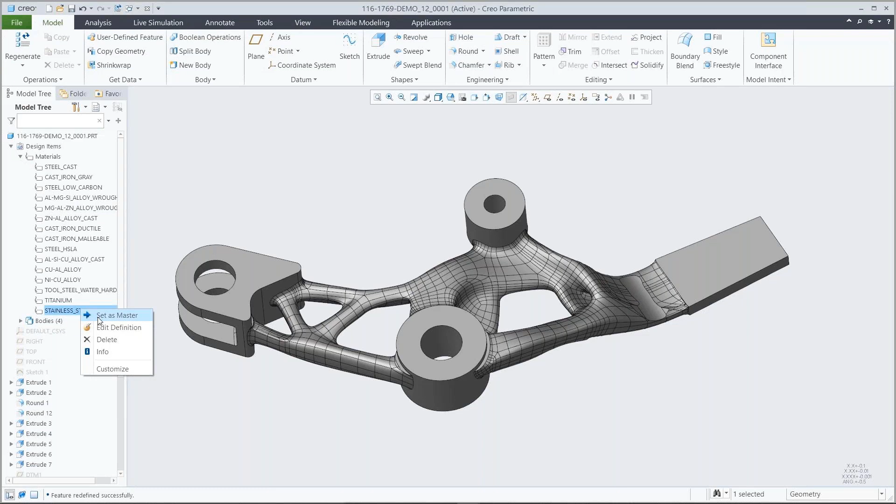Once we have that geometry, we can take it a step further and do real-time simulation using Creo Simulation Live. It's taken all those loads and constraints we laid out in Generative and carried them over here into the model, so we get instantaneous feedback to see detailed von Mises stress values, exactly where our problem spots might be, where we're getting maximums or minimums. We can take a look at our deformation and see if our part is responding how it should based on the loads and constraints.

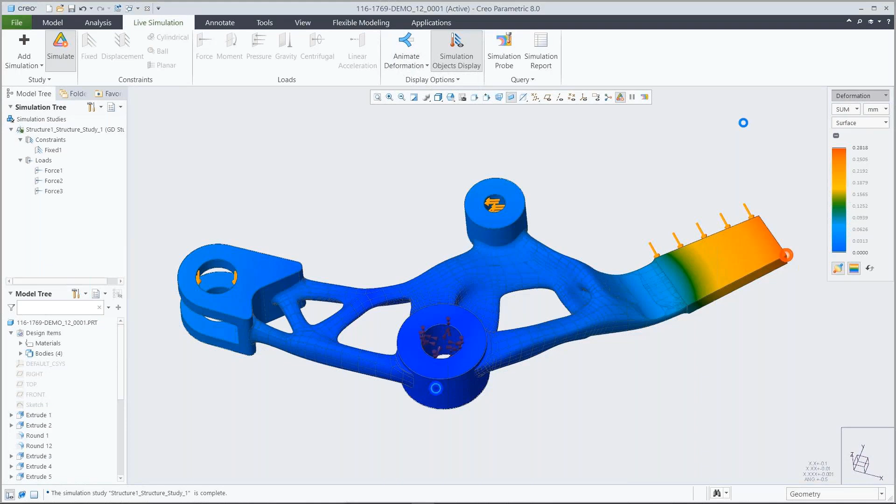So Simulation Live, or CSL, greatly benefits our different designers and engineers. Maybe they don't have the experience and training needed to run full-scale analysis, which can often be time-consuming. But with CSL you don't need any of that, and you don't have to spend time waiting around for results. We essentially just click a button and get results back instantly.

Once we have that all built out, we can go ahead and swap that back in, and we're good to keep moving forward from here.

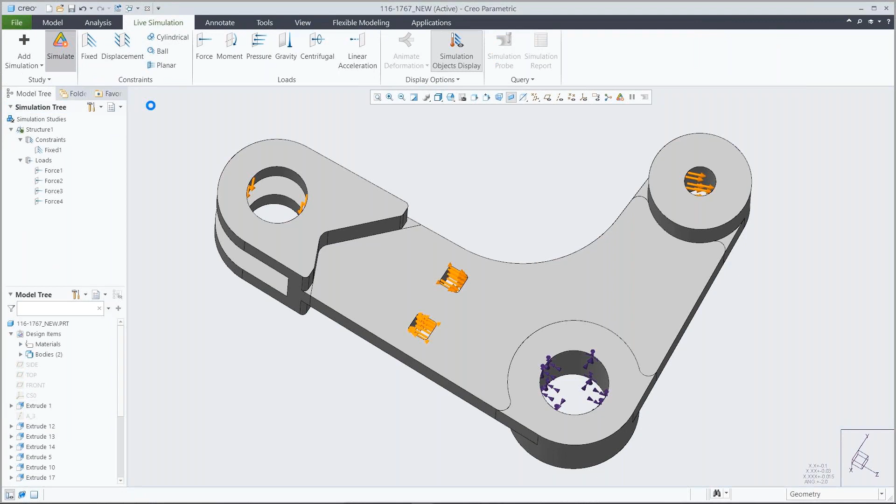Here's another part that we're working with. This is probably also in the early stages of development, which is a great time to get feedback from our analysis, to see exactly where we're at, where we might be having problems down the line, or where we could start to make improvements and work towards a more optimized design model overall.

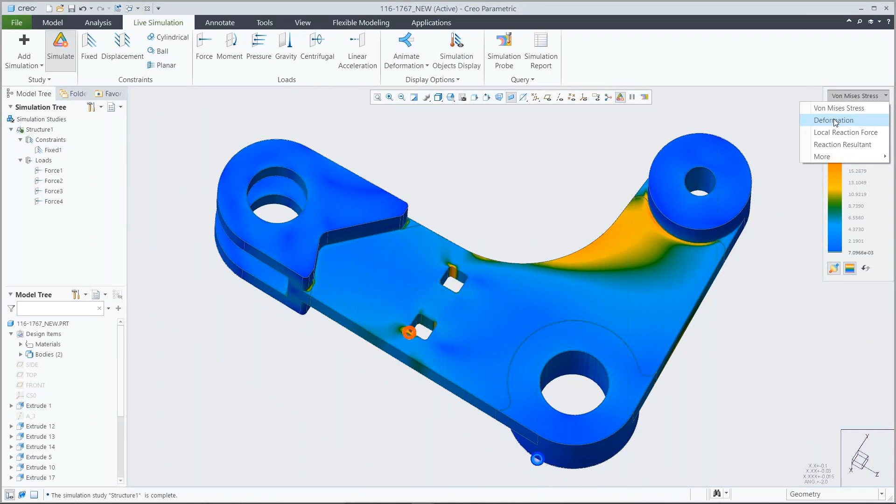Again, with Simulation Live you immediately get access to those results. You can see where we're getting the highest amount of stress in the model. Right now, it's at a pretty critical point in the design, so we need to find a way to more evenly distribute stress throughout the model. We can quickly check in on that deformation to make sure our model is working how we intend.

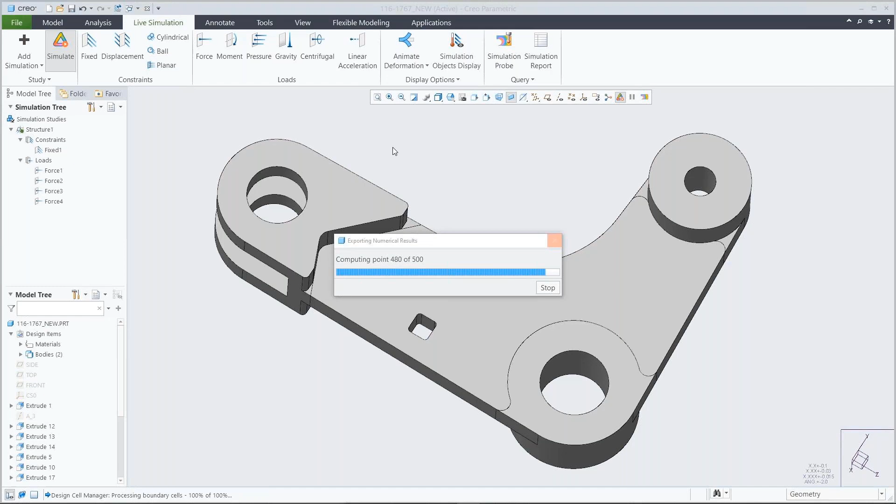What we can do now is export some of the results we got throughout the model from our analysis and use that to drive the different features we're using in the model. More specifically, I'm going to use those results to drive a variable density lattice, taking the results from our simulation to thicken the lattice where we need support and decrease the lattice density where it isn't needed. It's helping to distribute stress throughout the model, especially away from those critical areas.

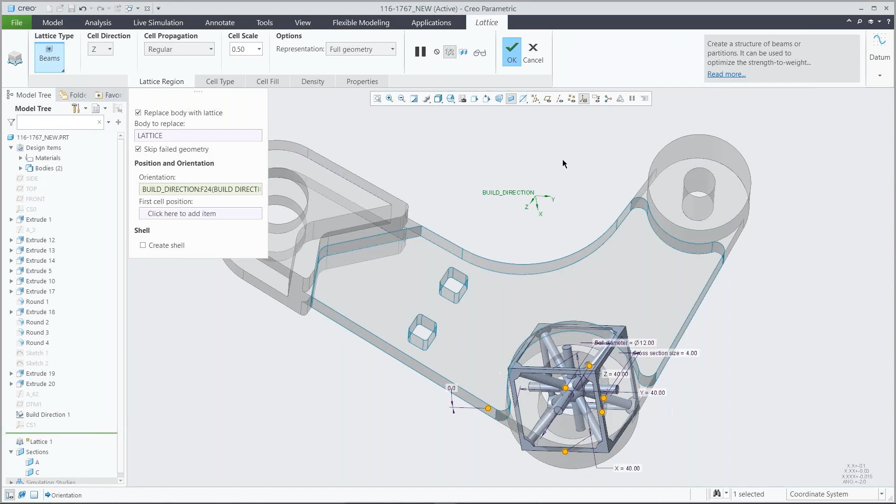Setting up lattices is very straightforward. You just specify which areas you'd like to replace in the model with a lattice, and then you have lots of options for the shape and size of the lattice cell to lay that out. After that, you have lots of options for the structure, really getting the lattice to fit how we want it to look and function, and you can change that as needed.

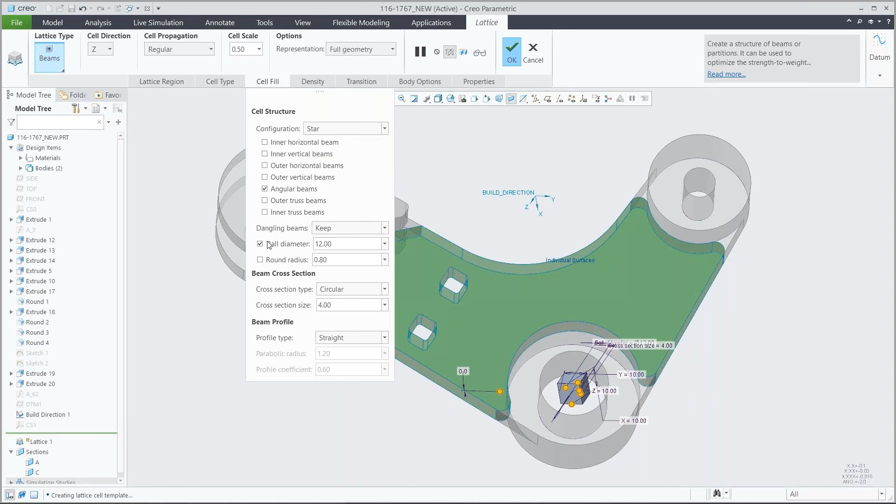Finally, what we're going to do here is drive the density of the lattice based on the results we got back from our analysis. This is really what I mean by analysis-driven design: we're using analysis not only to validate that the design has been built out correctly, but also, right from the beginning stages, to drive the function of the model and ultimately give us a model that's going to work better in the long run.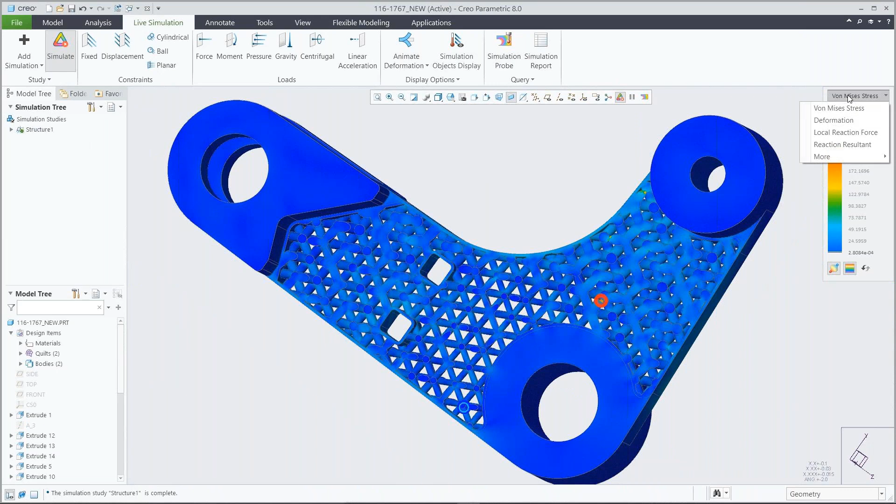That's a huge plus. Looking here also into our deformation, we can see where we're getting there, and it's looking to stay about the same as it was before, but we're able to change that around, and probably also change how much material we use in order to get here. So we're not only able to distribute the stress better, but also save on weight of the part.

And these are all things that were only possible due to all the different manufacturing capabilities that we have here in Creo. There's a lot more that goes into additive design in Creo, but I'll touch more on that in a minute.

Now, obviously, there's a lot of different changes that we made up until this point, probably things that we want to share off with people on our team to get some feedback. One of the best ways we have of doing this in Creo is using augmented reality.

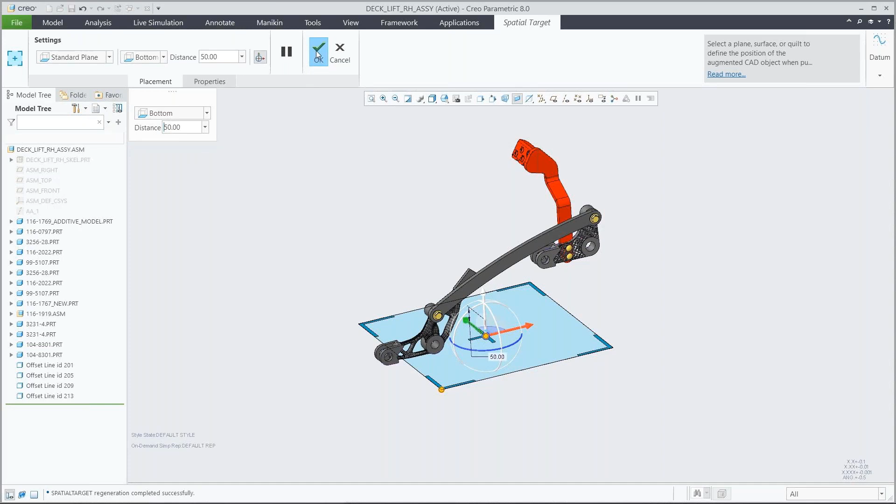This is going to take the model that we're working with here in Creo and share it off with others, where they're able to view the model right in their own physical space, on their desk, in their office. So that's what I'm doing here, first and foremost creating a spatial target, which will essentially act like the floor for the model, so whenever the end user pulls up this model, they're able to project it into the workspace where they want to view it.

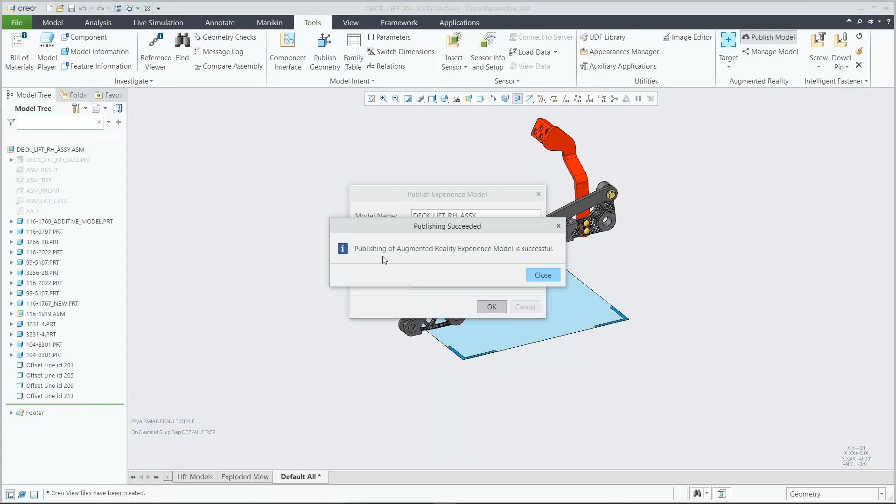This is completely changing the game for how we do things like design reviews and build out virtual prototypes. It's transforming how companies are designing, producing, supporting, and even selling their products at the end of the day.

So here we're just simply creating a QR code that we can take and send to whoever we want to view the model. Once we have that sent out, we can switch over into what they would see from their view, where they're able to pull that model up and view it right on their desk. They're able to rotate, scale, even look at the different combination states from within their experience. It's way better than just simply getting a screenshot to share off with somebody's workstation.

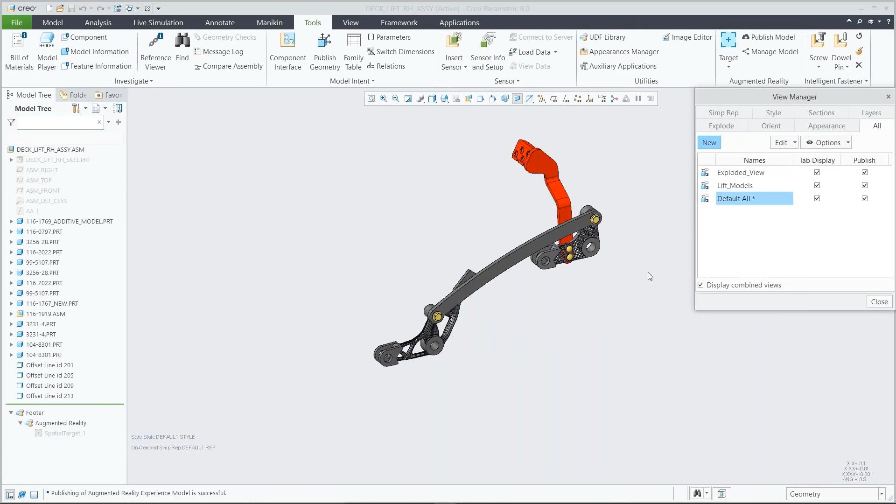Now taking what we've had here, once we've had the chance to review it, we've decided that we'd like to move forward with a certain piece of the design. So first, what we want to do is get a prototype built out using a 3D printer. Let's go ahead and isolate the part that we're interested in. From here, we have a lot of functionality to do this work from right within Creo.

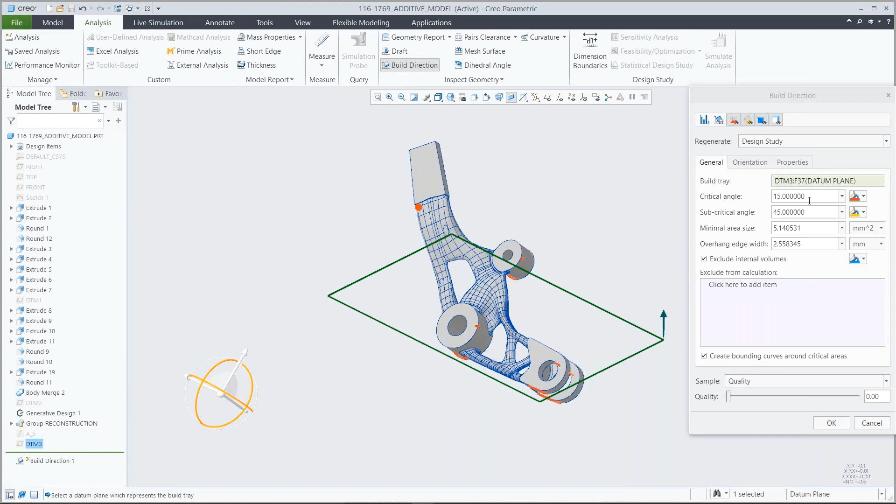First thing I want to do here is what we call a build direction analysis. This is going to allow us to determine the optimal printing orientation for the model. It'll take into account things like our critical and subcritical angles, which determine the amount of support material that we need, and that's what we ultimately want to optimize around. We want to decrease the amount of support material required, cut down on printing time, and even take into account the removal of support material in the post-processing phase.

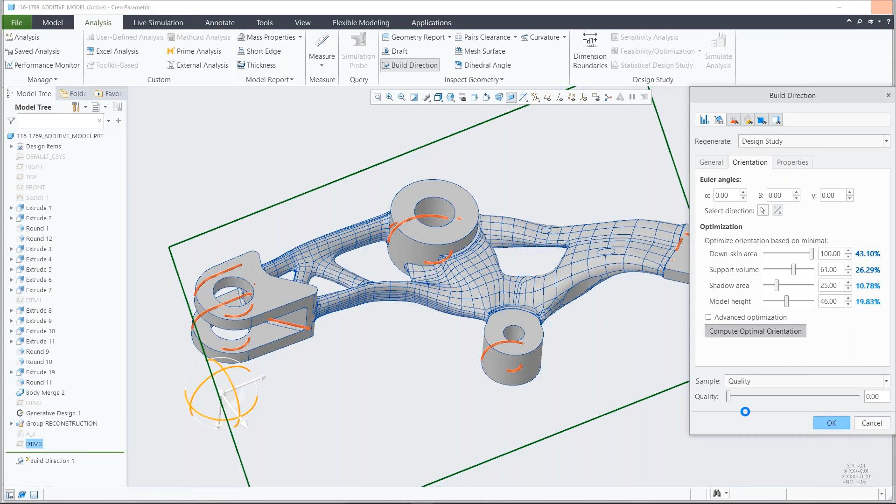This is very quick to do. We can see that the system goes through multiple different iterations until we converge upon a solution, and once it's converged, we can check out the result that we got. Once that optimization is complete, we have a new orientation to print from.

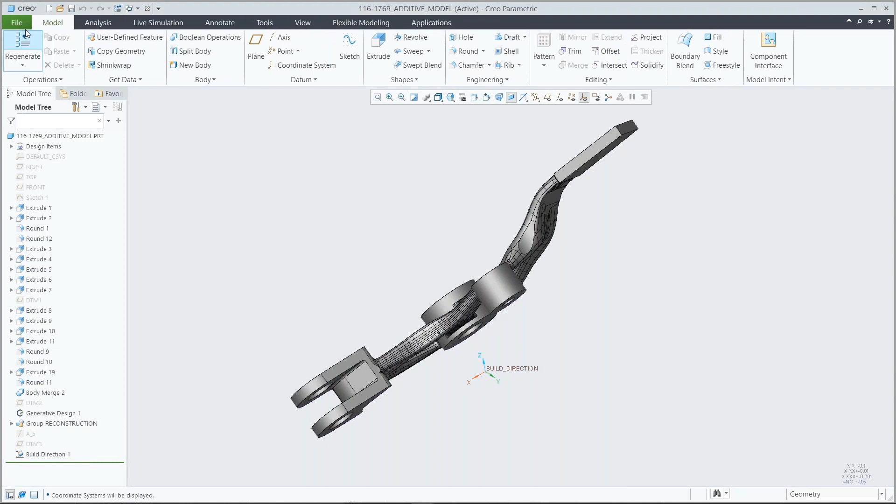So we can take that model now and arrange it onto our 3D print tray, which again, we can do right from within Creo. What we can do here is optimize the tray to fit many different parts on it if we'd like. We can also do what we call a printability validation to check our model against the thin wall threshold to make sure our model isn't going to have any issues in that regard. So we can just simply let that run through.

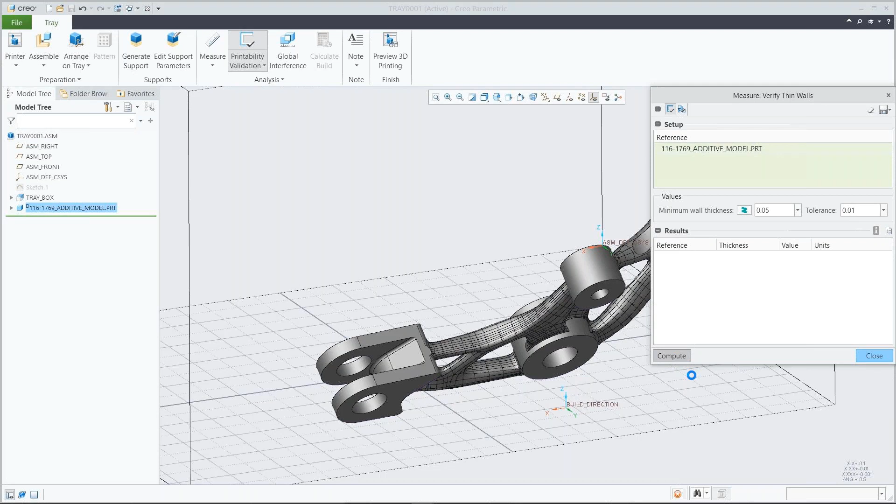And in our case, we don't seem to be having any issues. Once we confirm that our model is good to go, we can go through and generate our support structure within the same environment. There are a lot of different parameters that we're able to go through and change here to better represent the printer that we're going to be using out in the real world.

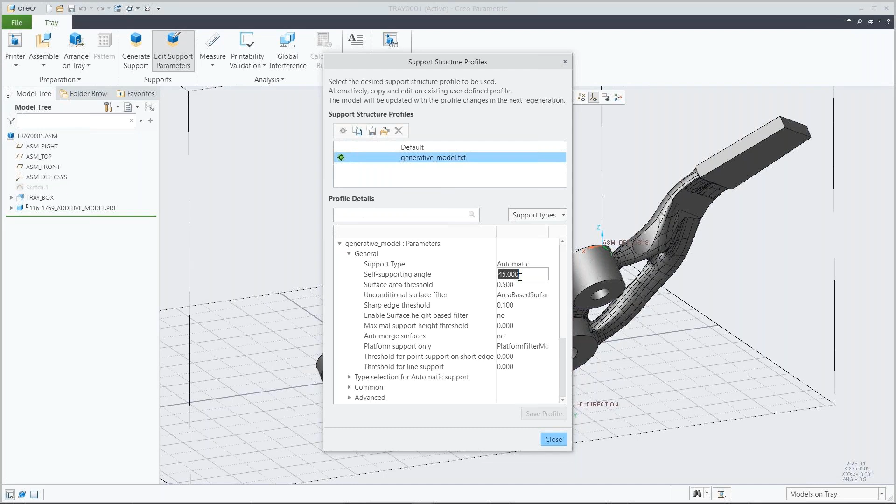So we can set up our different support profiles to focus in on that support type, the angle that our printer requires supports at, and a lot of other parameters to best build out our support structure for that model. We'll go ahead and let the system build out that support structure, which Creo actually builds out as a PRT file that we can work with and manage going forward if we'd like to. From here, we could review that support structure and then go back and make whatever changes we might need to. I'm interested maybe to see how our tree supports would do here in the model.

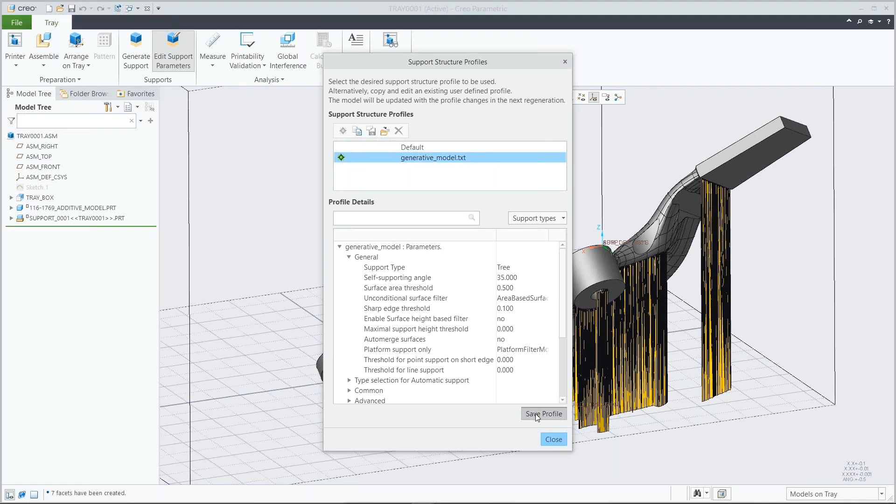Overall, there's a lot of additive manufacturing functionality built into Creo that we're taking advantage of. We can get our support built out. We could take it another step forward if we wanted to create and visualize a CLI file for this model, which gives us the slice file needed for printing. We also have the ability to integrate with both plastic and metal 3D printers, so you don't need a third-party step to get that 3D print out to the printer. You can save time and avoid any issues due to data translations within that process.

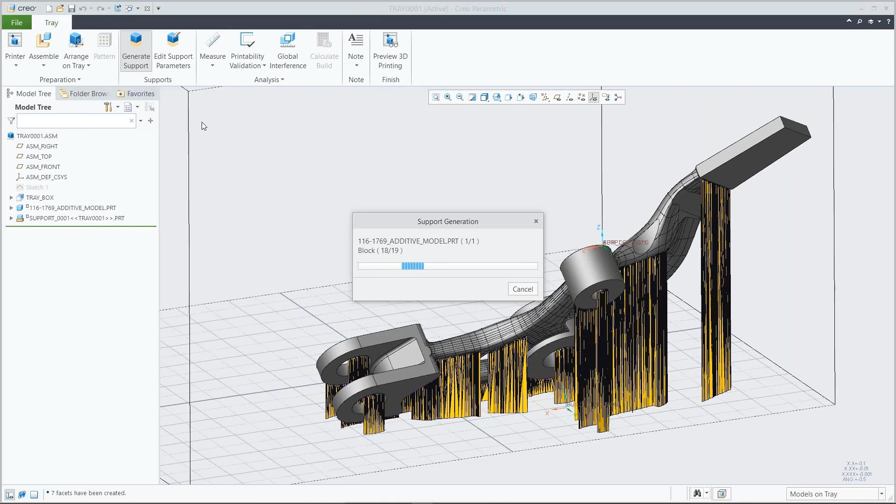So really everything from the lattice design using our simulation capabilities to figuring out the optimal print orientation to even getting down to generating the supports and sending it out to the printer - we can really get our job done right from within Creo. And there you can see our new support structure profile.

Okay, so here we have just about a minute left on the hour, and first and foremost, I want to see if we have any questions, and if not, then I definitely want to say thank you everybody for jumping on today. A ton of different things that we're able to hit on, but really just want to introduce you to the fact that we have a lot of things built into Creo currently to give you what you need to get your job done more efficiently on a day-to-day basis. And even going forward, we're going to continue to improve Creo and continue to invest in these different types of emerging technology.